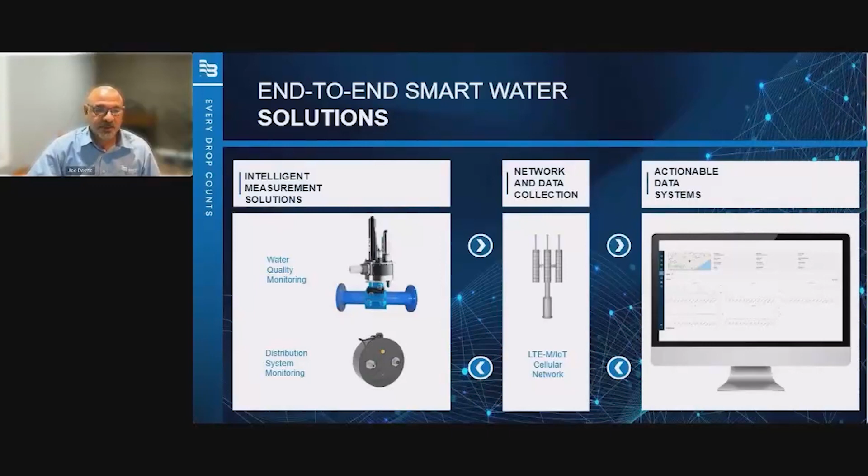So for today, we're going to be focusing on these sensors. We're going to be talking about water quality sensors, and we may touch a little bit on distribution system monitoring for pressure. And these sensors that we showed Trino and his staff are all cellular communication sensors. So it allows the information to get up into the cloud in an efficient, easy manner, without having to worry about managing a network, and into a SaaS software system, actually the same software system that they're going to use to read their meters. So it's field deployable, it's easy for the guys to figure out what's going on in their distribution network. So let's take a look at a couple of these devices.

And the first one we want to talk about is something we call the pipe scan. This device is tapped directly onto the water main. It allows you to have no waste stream at all. It has a straw that brings the water up, passes it across the sensors, and it can monitor up to 10 parameters, including organics, which is important for some systems. Without having any reagents in the system, with all being electrochemical, we don't have to worry about the waste stream at all, and it goes right back into the pipe.

The other thing that's very impressive about this is the full-scale event detection that's available. It'll send you real-time alarms. It'll let you know when things are starting to change in your system. It's mountable in multiple versions. The version I'm showing here is directly on the pipe, which works real well in the network in locations like large meter vaults, vaults for hospitals, transfer sites when you're purchasing or selling water to other systems, booster stations, and where it comes out into that area.

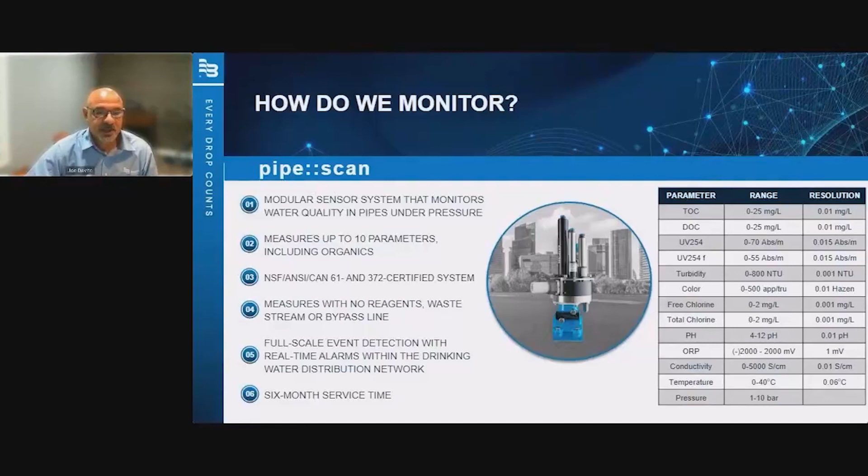The maintenance schedule is spread out, about a 6-month maintenance schedule on this device. The second device we want to talk about is a battery-operated, low-powered device. This device, as you can see here, is what we call the MetriNet bollard. The bollard being it is self-contained in that one unit.

It allows you to bring it out into your distribution network, get into possibly some residential streets or along some roads and mount this. It looks like a telephone pedestal in a lot of ways, and people really won't even understand what it is on the side of the road. But what it is, is something that's giving you insight into this distribution network and allowing you to see what's happening in that system in a near real-time scenario.

So whether you're monitoring chlorine, pH, whether you're monitoring turbidity and you want to keep an eye on that, you'll be able to do that in the distribution network. Because it's battery operated, it's very simple to find a location that makes sense to you as a distribution operator where you want to put this. And again, no reagents involved with this, electrochemical sensors, so you don't have to worry about the waste stream and where that waste stream might have to go.

It allows you to have really proactive responses, and it allows you to gain insight, I know I've said that before, into what's happening. And I think Trino's going to help us understand what we mean by that when he talks a little bit about what he found out once these systems were installed in his network.

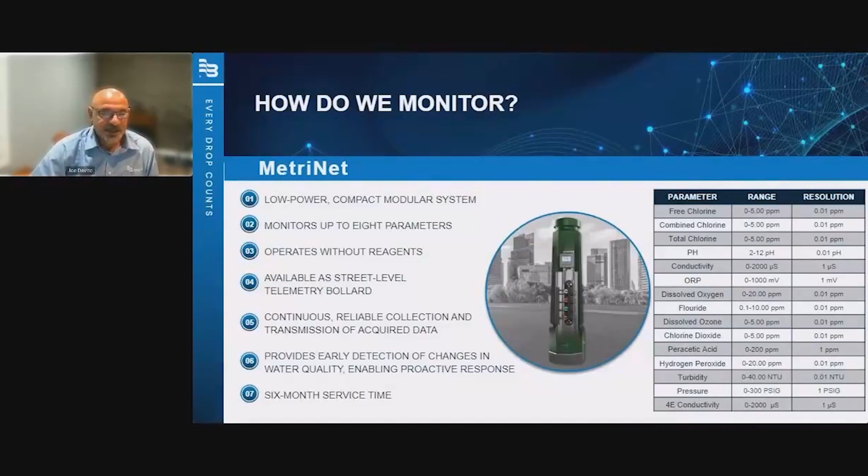So, I could stand here and talk all day about this. And the reason why I can do this is because it actually excites me. And the reason it excites me is because I operated a distribution network for 30 years. Retired after a 30-year career, wonderful career, enjoyed it and loved what happened in this. And when Badger Meter asked me to be involved in the water quality side of the house, because we were bringing that in after the purchase of some companies, ATI and SCAN, I looked over these products and I got excited.

I was like, I can't wait to show these to utilities and to be able to work with utilities to show them how they can go well beyond the meter and get into the distribution network and understand what's happening. Because we want to reduce our labor, we want to react quicker, we want to be able to let our customers know what's happening, not them tell us what's happening and then us react to that. And this is giving us the ability to do that.

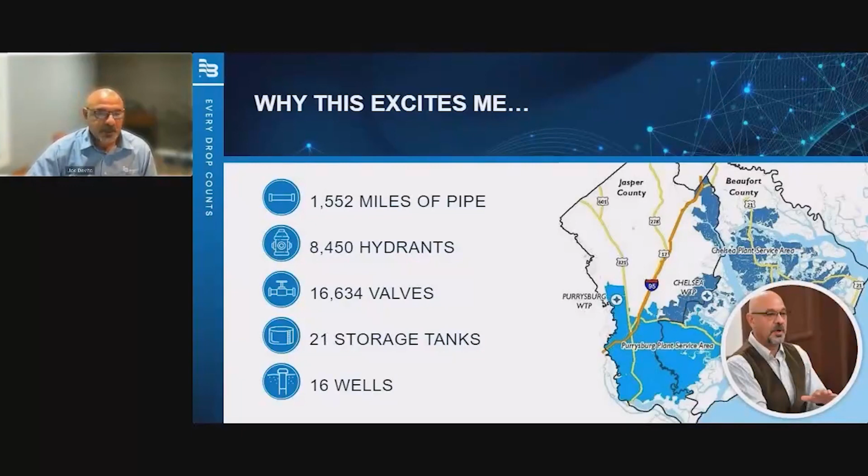So with that kind of overall of what a smart water solution is, let's get into the nitty-gritty about what happens when you put one into the system and why you would do that. So I'm going to turn it back over to Trino to talk about what they did.

Wow, thank you, Joe. That's a tough act to follow. So one of the beauties about our industry is this. There are many forums out there that allow us to build our peer network, and there are many projects out there that allow us to expand our knowledge and our capabilities by connecting with other individuals who are passionate about their industry, just like Joe.

And I'll tell you, the very first time that we met him was during our project kickoff. So sometimes you hear people talk, and you really can tell who knows what they're talking about, who's lived it, and who's just following the script. And it was very obvious that this guy had pure passion for the industry. And so at the time, my boss, the assistant city manager of Galveston, Brandon Cook, is sitting on the opposite side of the room, and we're texting each other, saying, who's this guy? I would hire him right now on the spot. And I've never shared that with Joe, so this is the first time he's actually hearing it.

But what our industry does is it allows vision to sharpen vision. And the reason we're coming back to one of these slides that Joe presented earlier is because a portion of this slide I had seen in the past. And as we described, we're getting ready to do a large system, which I'll talk about here.

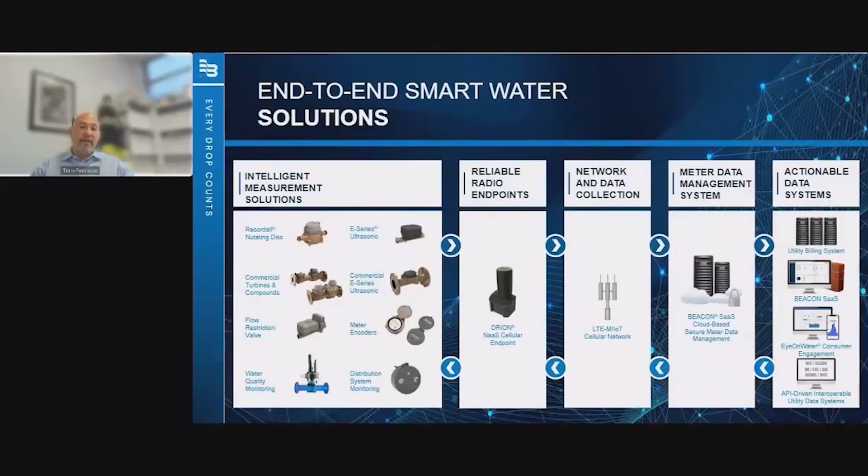And then we decided to really go down the path of an advanced metering infrastructure, which is part of our smart water system. And with that, we went with a cellular endpoint. We went with all the bells and whistles, every piece of technology that Badger had available, we went with. We have the meters that have temperature, leaks, backflow, tamper, remote connect, disconnect on 100% of our residential meters. We have pressure monitoring with the distribution system monitoring system that they have, and we have water quality, which is what we're talking about today. Why did we go through that entire effort?

Well, really, when you see the challenges that we face, it not only becomes important to modernize our system, but we really owe it to our customers, to our citizens, to provide them with quality service, a quality product that's resilient, that can withstand the challenges that we face and come back so that they can have their homes here and have a great livelihood. And in order to do that, we need to improve our system. We need the data so that we can make wiser decisions, make data-driven decisions. And so now let's talk about water quality.

And as we move into water quality, I want to share a little story with you because you could say, well, why? What's so important about water quality? We have the typical things we always do in a distribution system, right? But as population grows, as the world changes, water is a precious commodity. And we got to be good stewards of that commodity. We got to take care of it.

And I mentioned earlier that we have an old system and it was built in segments. So our system has quite a bit of dead ends. Not all of them have been found yet, but every dead end needs to be flushed, which is a waste of water for one. And then on top of that, it causes challenges with the quality of your water as the water ages at the dead end.

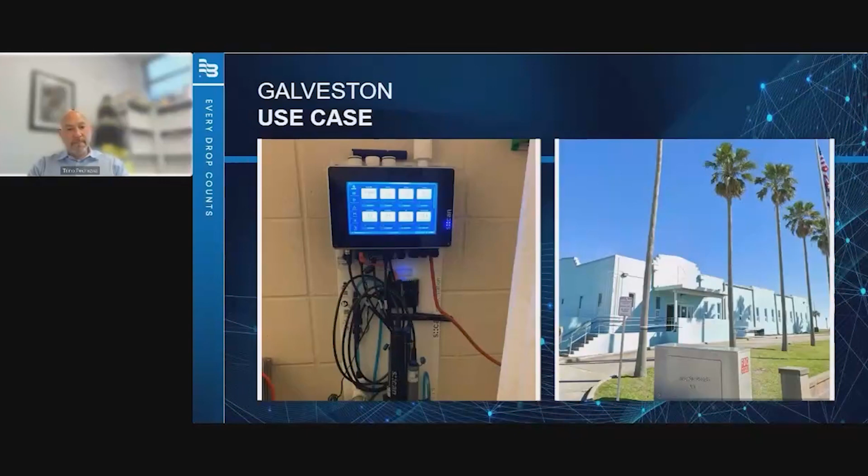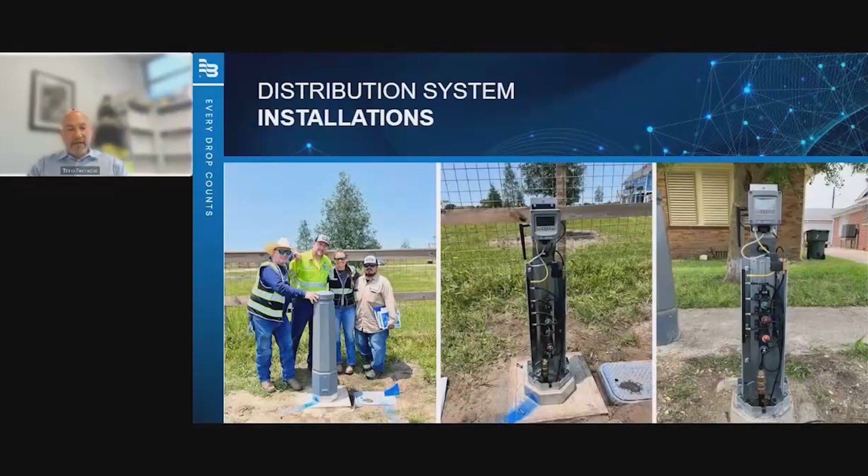And then if you dive into the data and you go into the time series tab, you can really begin to see the granular trends of your data and see what's going on, see when it's happening, and then start to act from there, right? So right now, because the project's kicked off and we're just starting these up, we're going through some of the growing pains where we're calibrating the instrumentation that's part of the devices, where we're seeing how to use it. And we have meetings set up with a Badger team every 2 weeks so we could examine the data, examine the problems we're having, and start working through them to really fine tune our system before we begin to expand it out.

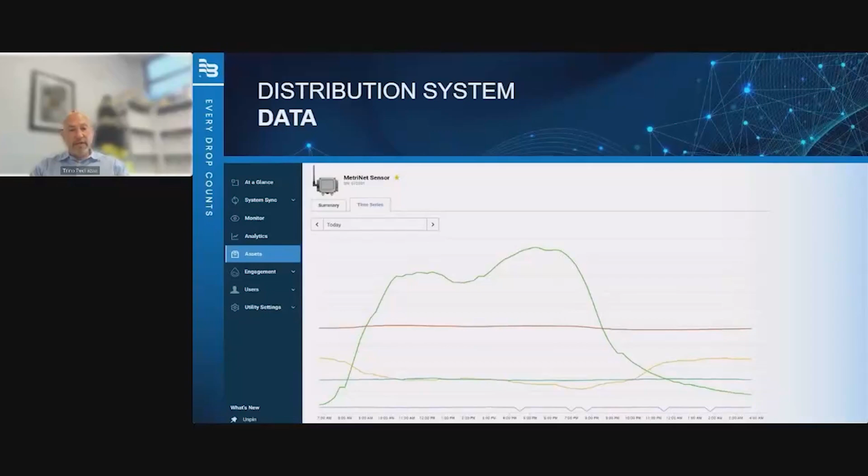And so the problem with having data is, well, one, you have to look at it, right, which is an effort. But two, you are no longer ignorant to what's happening in your system. And as part of this project, we saw something that happened pretty much right away that scared us. It was one of the initial issues that popped up, and it's a victory for the system. So shortly after installing the system and getting it calibrated, we have a residual that is well within our TCEQ limits, and TCEQ is the Texas Commission on Environmental Quality. And so it's well within our limits. And so we're all happy.

Tomorrow we're having our meeting. We're going to sit down. We're going to talk about how the data is looking and what to do now. And what we see is this trend line just starting to go down and down and down, pretty near zero, just bordering the minimum limits that we're allowed to have. And so off the cuff, we're thinking it's instrumentation issues, it's data issues. And so we're having our meeting, and at the same time, the fire department's out there, and they're reaching out to Ava, who I mentioned on an earlier picture, complaining about the pressure at a fire hydrant. Meanwhile, the rest of us are looking at the data with Badger people, and we're seeing that it's really low.

And so then we just ask the question, is it a problem with the MetriNet, or is it actually reading properly? So we send our guys after the meeting, they get out there, and then I get that scary text that says, I've got bad news. Every director's nightmare, every manager's nightmare, every supervisor's nightmare. You never want to see, I've got bad news. And so what they share is that the system is actually reading correctly. And so then at that point, we get crews out and we start to examine what's happening.

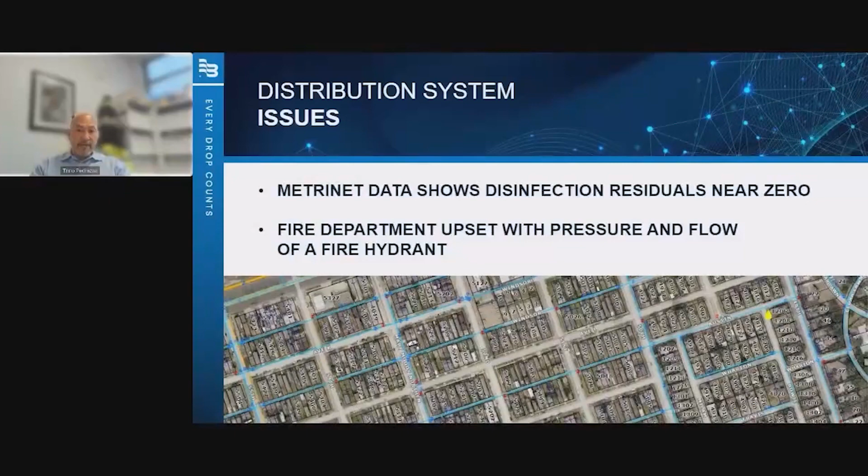So let's dive into what was happening. All right, so here we go. Here's a picture of the area that was in question at that moment. The yellow dot that you see right here, that little water drop, that is the area of our MetriNet, okay?

And so what I wanted to do in this GIS picture was I took off all the layers minus the distribution system, and I wanted to highlight just some of the path of the water lines connected to the MetriNet, because this is an area where we had problems.

Our staff got out here and they began to investigate all the area. They started flushing fire hydrants and capturing residuals. And we were seeing residuals that were very low, and we just didn't know why. And so at that point, we start to question, well, are our pump stations producing the right dosing? And they go and they investigate, and it is. So the problem comes back to the distribution system.

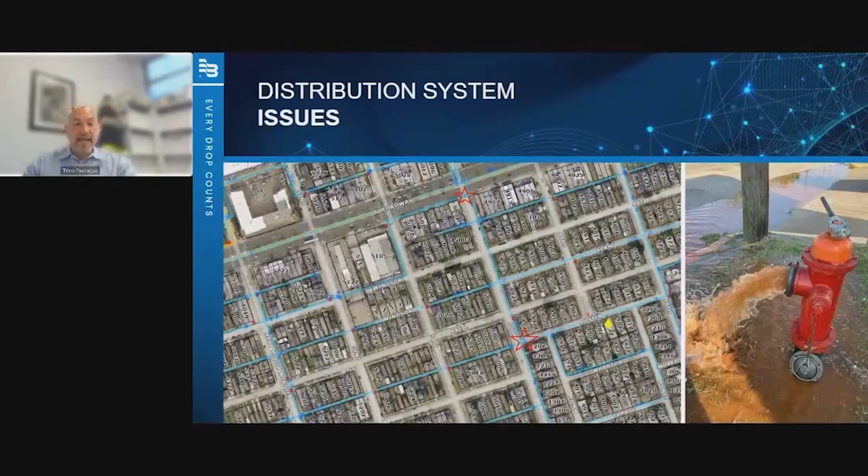And what we find are a couple things. We find some, well, not valves, but we find some dead ends that were not mapped. And so as we find those dead ends that are not mapped, obviously that gets taken care of. But we keep looking at the system, and I go back to the first picture that I showed you.

So I sent our guys back, and I asked them, what is our dosing at the pump stations? And they come back. And so our staff is doing what they were supposed to do. They're really knowing their system. They're really getting involved with their system. And they were trying to make their dosing efficient for our system. So during the winter, they were maintaining like 2 parts per million of total chlorine for our system, which is good, and it was holding.

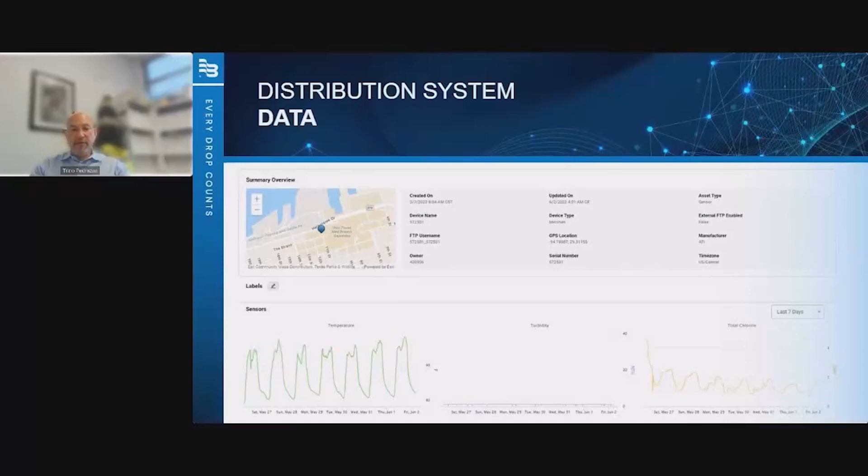At the same time, we're looking at the entire system, and everything seems to normalize after a day or two of all this work and flushing and whatnot. So that was a victory that came off of all of this data. Our final results is that we found 2 closed valves. We found 2 unmapped dead ends.

And boy, I tell you what, when we found them and we opened it, that water was disgusting, right? So now they're on our flushing cycle. We adjusted our dosing. The total chlorine residuals normalized throughout our system. Wonderful thing. No more problem, right?

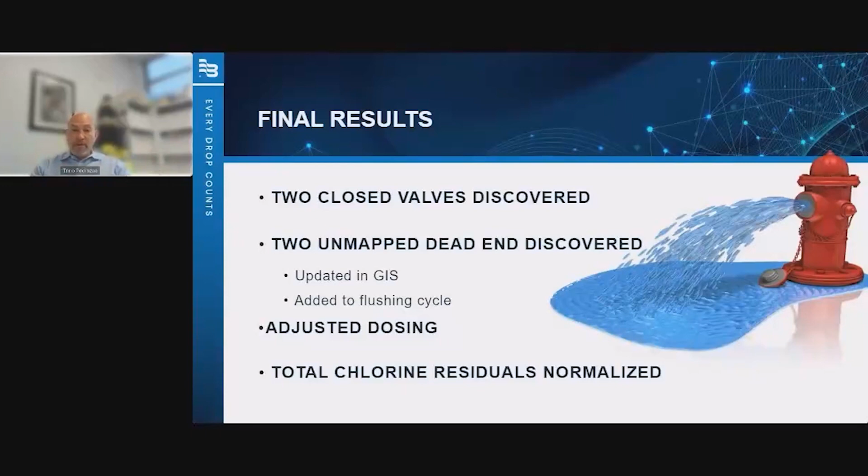And so ultimately, our project, we talked about enhancing SCADA and GIS and our work management system and our entire smart water solution. The whole goal is eventually to integrate multiple components from all of these different systems. While this is going on, we're also modeling our system. We've hired a consultant to model our system.

We're purchasing modeling software. We're incorporating all of this data in, and we're going to use this to really calibrate our models. We're going to use that to help us really determine where we have capacity issues, where we need to change our storage practices, where we need to change pipe, period, right? Ultimately, as a city, what we want is our customers to prefer our water over bottled water.

And then on the inside, we're hoping that with all this technology and the gradual and continued learning of how to use the technology and the data, that we will be able to bring some operational efficiencies when it comes to flushing, so that we're not just flushing and flushing and flushing. We're using the right dosing, and maybe even lowering some electrical costs. So on that note, we're going to move to our Q&A.